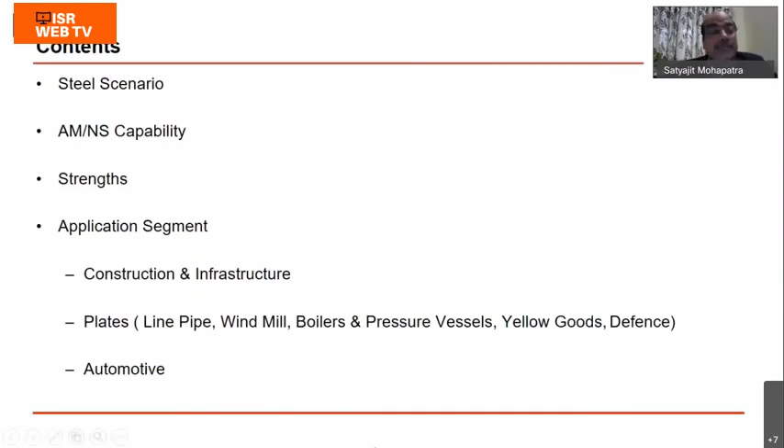So in my brief presentation, I'll be covering the steel scenario in the country today, what capability ArcelorMittal Nippon Steel has, what are the strengths, and what are the various application segments it covers, and how it has linkage to the entire technology. If you talk about the steel scenario, India is second in crude steel production.

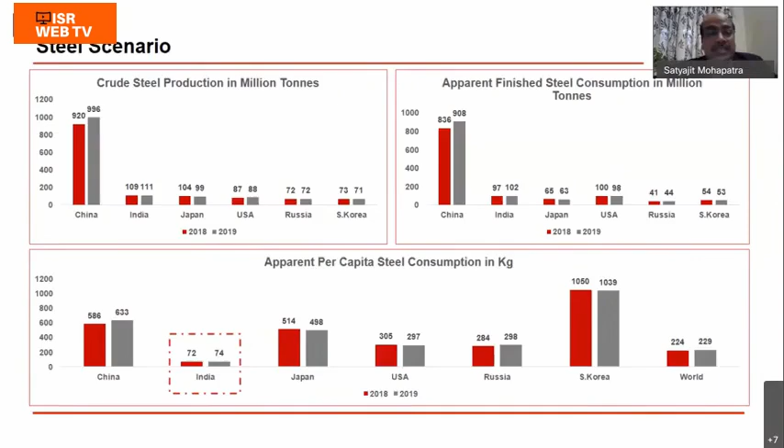As far as apparent finished steel consumption is concerned, India is also number 2. So definitely we have progressed a lot. But what has happened to the per capita steel consumption? We are at a very low level of 74, and compared to the industrial world standard of 229, we are at a very low level, which essentially means we have to go a long way in meeting the requirements.

If you analyze the entire steel consumption, 62% of total steel is used in the construction sector, around 10% in automotive, 3% in packaging, around 3% in railways, and the engineering industry consumes close to 22%.

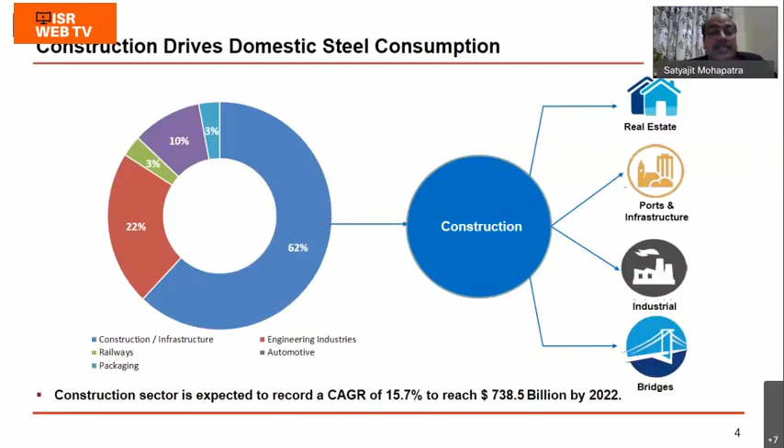As far as ArcelorMittal Nippon Steel is concerned, it is a joint venture where ArcelorMittal holds 60% and Nippon Steel holds 40%. And definitely there is India growth.

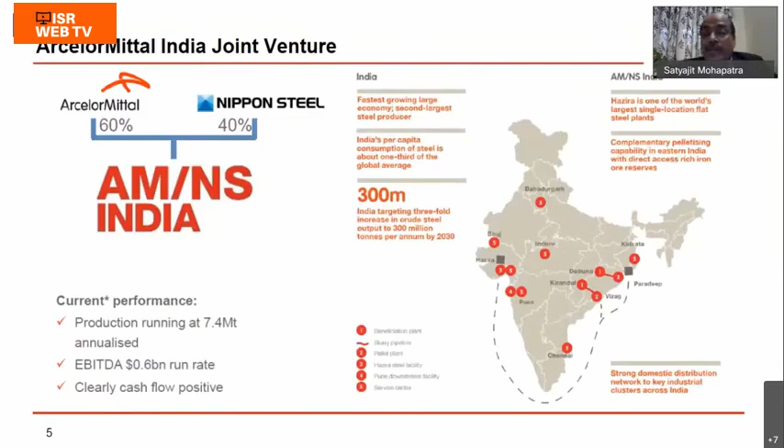India is the fastest growing large economy, second largest steel producer. India's per capita consumption of steel is about one-third of the global average, so there's definitely a long way to go. India's target, as per the national steel policy, is to achieve 300 million tons by 2030. This gives a very wide room for us to think how we can really achieve it, and this is where the technology of flat and long technology will definitely hold a key.

Coming to the entire process flow, when you talk about the technology, I'll give an example of the process we have in AMNS and how this is really helping. When you talk about the beneficiation of iron ore, we have our beneficiation plant in a place called Kirandul.

And we have a pelletization plant in Vizag. The distance from Kirandul to Vizag is almost 267 kilometers, connected through a slurry pipeline. This is nothing but technology. Can you ever imagine? This wasn't conceptualized today, it was conceptualized almost 20 years back. The slurry pipeline makes transportation very easy, and the raw material, iron ore fines in slurry form, is transported to the plant.

After pelletization, it comes to Hazira. From Vizag to Hazira, it comes by sea route. Today a lot of discussions are happening about transportation through sea route, but it was happening before, almost 15-20 years back. So this is how technology has advanced, not only in manufacturing but in logistics too.

As far as the Hazira facilities are concerned, we have a captive port adjacent to the plant which helps in logistics. Hazira is very unique in that it has 3 iron making routes: Midrex, blast furnace, and Corex. All three kinds of iron making routes are available in a single location, giving wide flexibility to use raw material to our advantage.

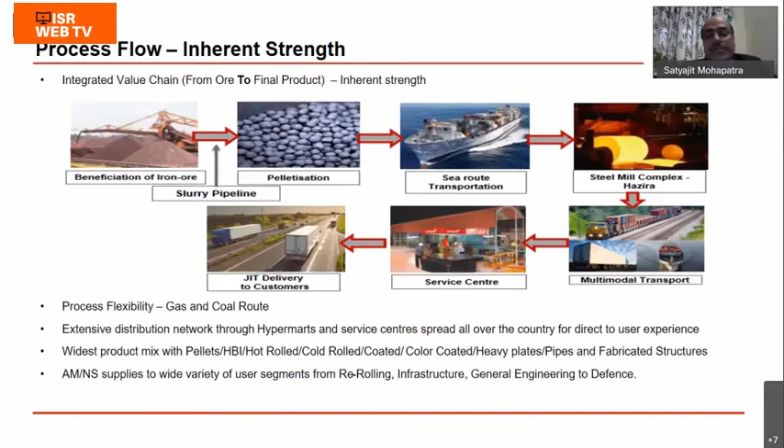Then, the widest product mix - pellets, HBI (hot briquetted iron), hot rolled, cold rolled, coated, color coated, heavy plates, pipes, fabricated structures - endless. So when you talk about flat products, you have the entire range of products currently available, which can meet the customer requirements.

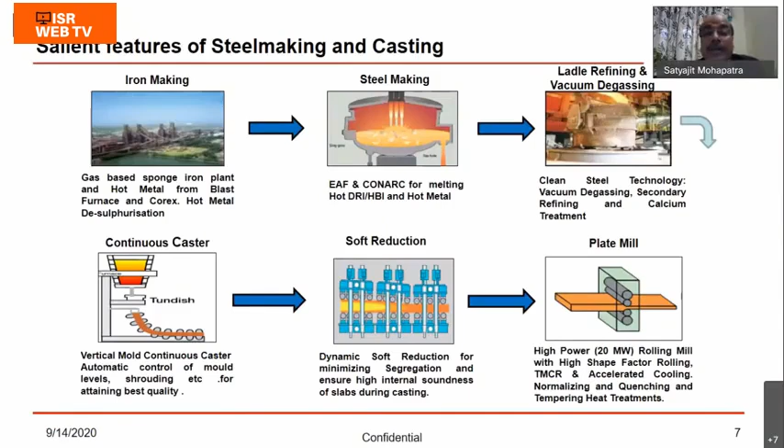Now, when we focus on technology, over a period of time the customer's taste and requirements have changed. Steel making and casting have really undergone a lot of changes with respect to the various processes, and today this is the result of what we are getting. This is just a basic, simple example of the steel making and casting process I've shown, because it talks about the various aspects - which stages are important and where we can get what kind of quality, how the quality is controlled at various stages.

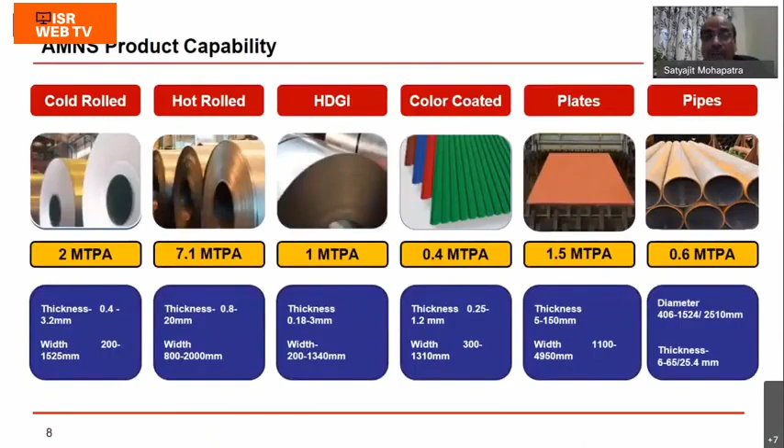As far as the entire flat product is concerned, we have cold roll, hot dip galvanized, color coated, plates and pipes. I'm not going to go into details of the entire product range.

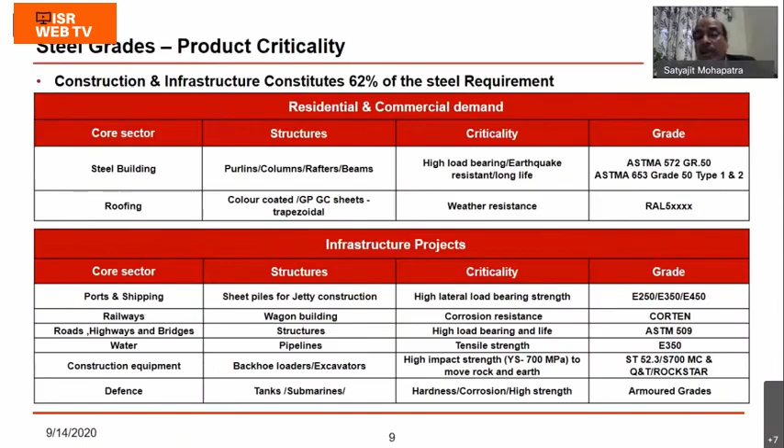Now I'll just try to focus on the application part - why do you produce different grades? When you talk about steel grades, as you know, construction and infrastructure constitute almost 62% of total requirements. Each product has specific requirements based on which the steel is designed, and accordingly you have the technology to produce steel to meet customer requirements.

Various grades of steel are used in various applications - crash barriers, steel and steel-concrete composite bridges. Mr. Susim Banerjee is here; INSDAG has done tremendous work on steel and steel-concrete composites, where, if you talk about the life cycle cost analysis, steel-concrete composites have a better chance and can be used. It is a very compact product, and at the same time it can really help in increasing steel usage in the country.

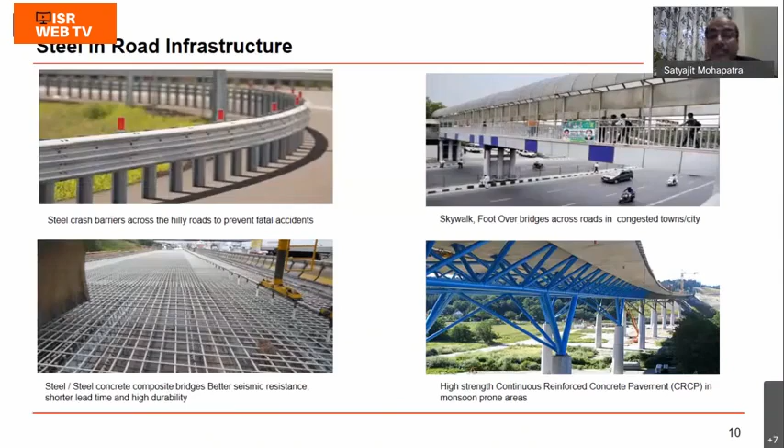Similar uses are there in various sectors - steel in rural infrastructure. In fact, the rural sector is growing at a very fast rate, with a lot of storage grain silos, farming equipment, and housing for all. So there are numerous requirements coming up where steel is used, with better quality.

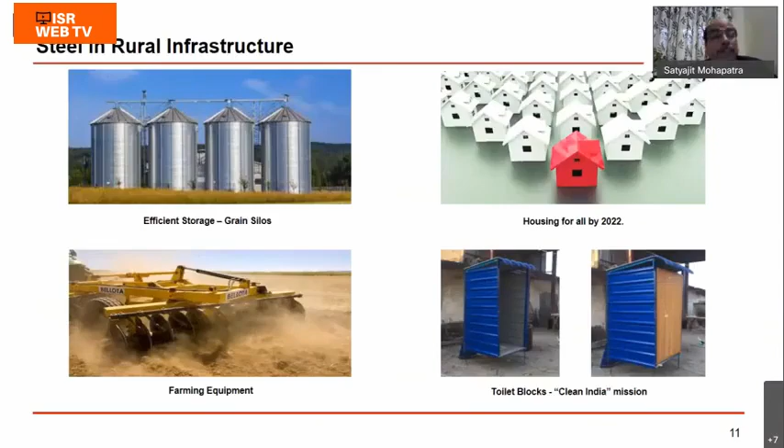Now I'll give a typical example of how steel is designed. Take the line pipe, used for both sour and non-sour applications - the basic important requirements are based on the application. If you talk about line pipes, it requires resistance to hydrogen-induced cracking, and soft reduction, that is metallurgical soundness, meaning it should be very good quality.

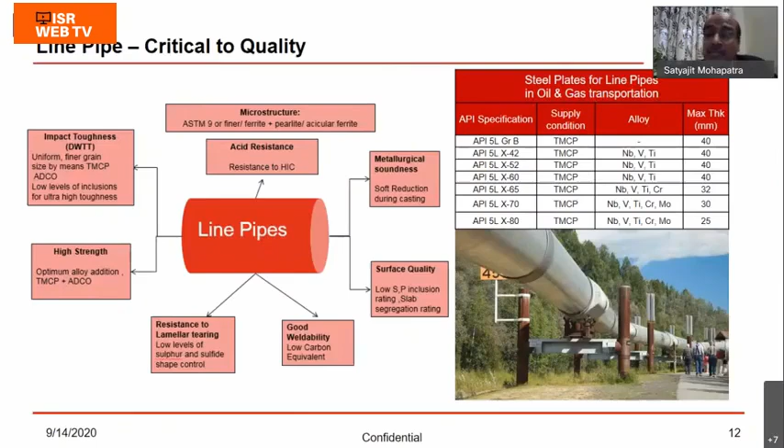The surface has to be excellent, it should have good weldability, and resistance to lamellar tearing. So when you want so many applications and requirements for a particular product, how do you design the steel? That steel has to be designed, meaning your technology has to support the requirements. Unless you have good technology, you will not be able to produce steel for the kind of applications I'm discussing today.

Same is the logic with wind tower segments - the steel used in wind towers. I'm not going into details, but also talking about boilers and pressure vessels.

Let's talk about the boilers and pressure vessels. The kind of steel being used today, and going forward, will have numerous applications. Today it requires a lot of effort in designing steels, and your technology has to support that. Almost all industries have the facilities now.

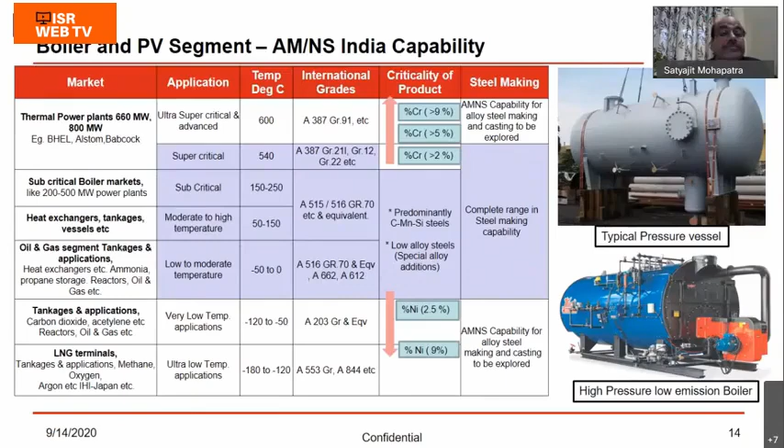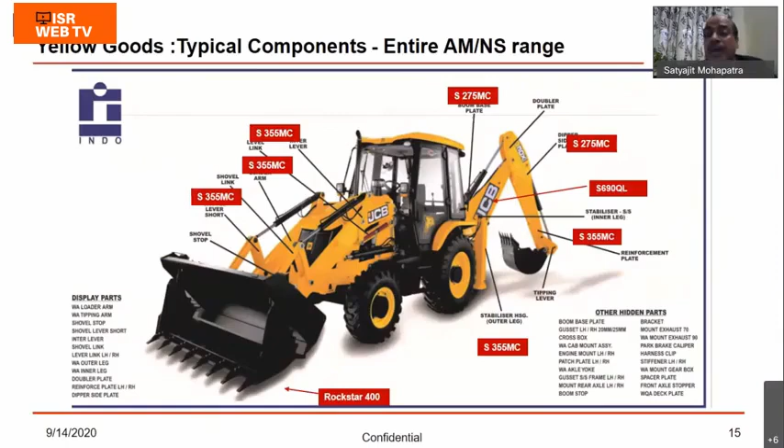Talk about the yellow goods sectors - today 100% of the steel is localized. There isn't a single steel type we cannot produce; we have the capability to produce all kinds of steel required for the entire segment.

Talk about automotive steels, your chassis - see how the strength level has gone up. Just as an example of chassis: a few years back, the yield strength of chassis frame steel was 460 megapascal. But today it has changed to almost 700 megapascal. When you change the strength level from 460 to 700, that definitely requires your technology, your mill has to be capable enough to roll high strength steels.

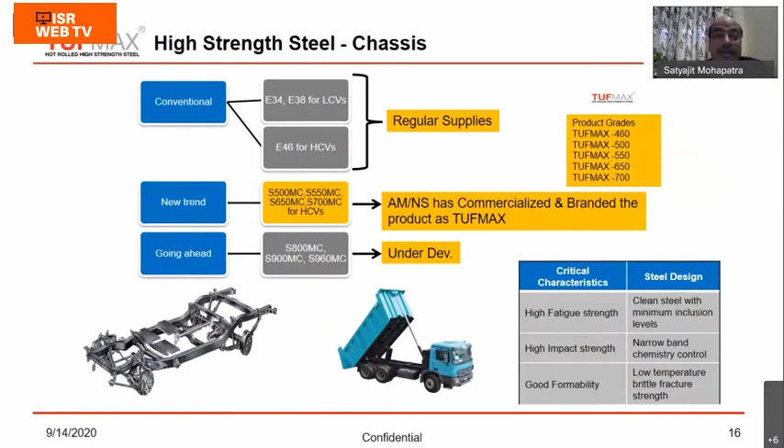Then you need the steel making facilities - not only upstream facilities but also downstream facilities, to process the high strength steels at our service centers. So these are the kinds of challenges that steel mills have faced over time, but today all of us are confident and can supply steel as per the requirements.

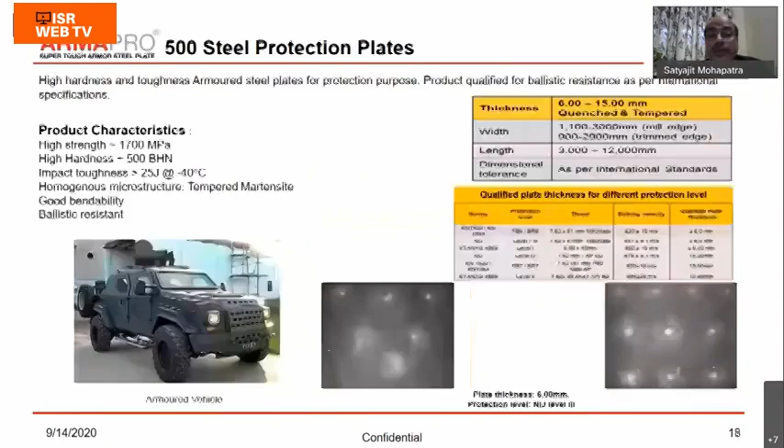Same is the case with wear resistant steels. These steels are used in various applications - that's what we have branded as Rockstar. Then there's ArmaPro, the armor grades of steel currently used for defense applications.

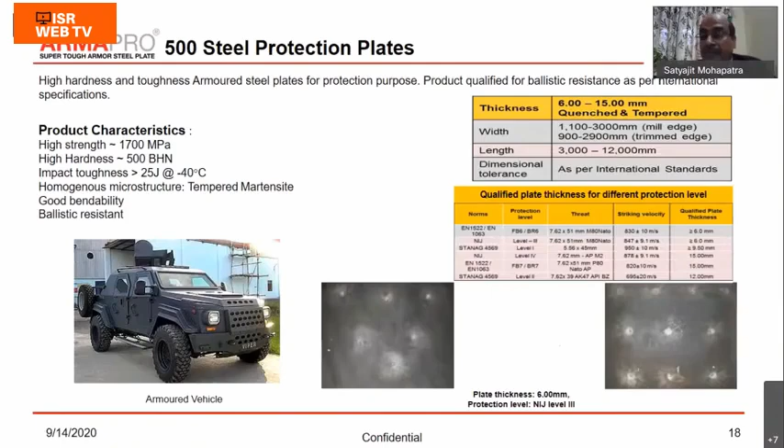As you all know, the government is giving a lot of importance and emphasis on defense. A lot of steel was being imported, but today it is being indigenized. In fact, yesterday's newspaper showed that MIDHANI has started producing bulletproof jackets, and we have the capability to produce that kind of steel. So this is the localization of all the steel required for the country.

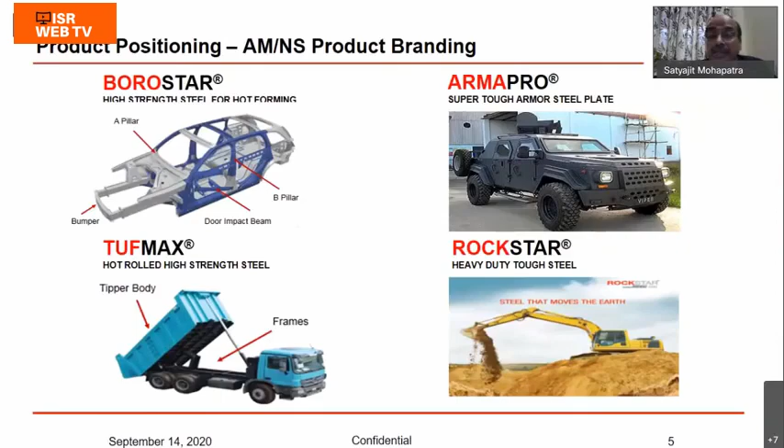As far as AM/NS is concerned, all the products we have branded - Borostar, used in passenger vehicle segments. TufMax, used in tipper bodies and chassis frames. ArmaPro, in the armor grades of steel. Rockstar, the wear and abrasion resistant steels used in the yellow goods segment. So these are the steels being used.

Now coming to the projects - we all know about Rohtang Tunnel, Dhola-Sadiya Bridge, Chenab Bridge, Bogibeel Bridge. We should understand that Rohtang Tunnel is the world's highest road tunnel, Dhola-Sadiya Bridge is India's longest bridge, Chenab Bridge is the world's highest rail bridge, and Bogibeel Bridge is India's longest rail-cum-road bridge.

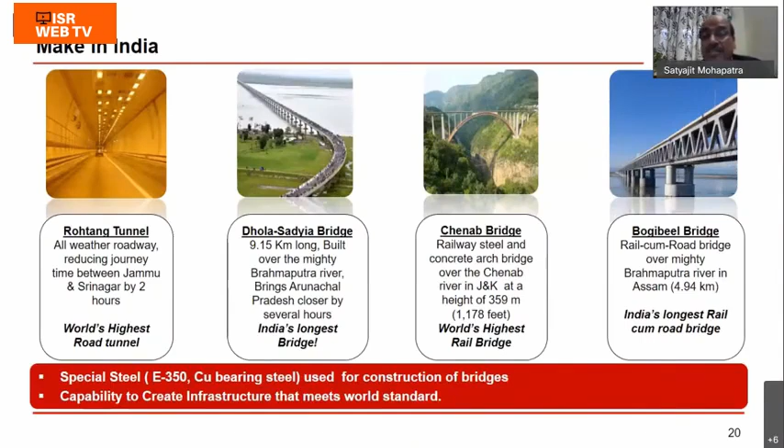This steel we have produced and supplied, so we should be proud of this. As Indian citizens, we should be proud that domestic steel has been used to make world-standard bridges. There are different prestigious projects already made where the steel has been used for metros.

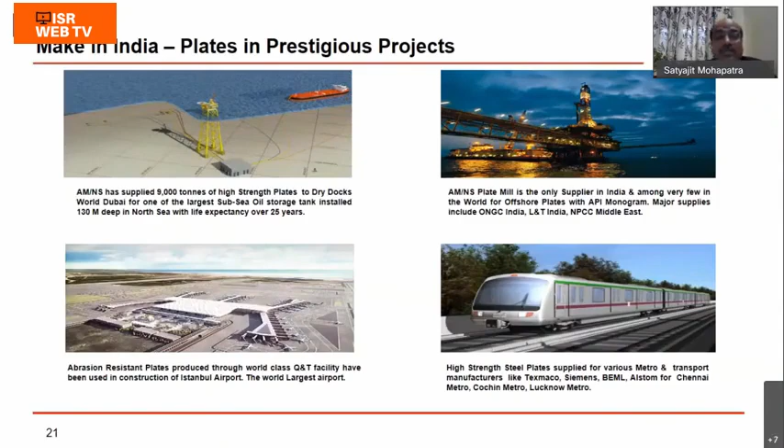Talk about offshore platforms, and the steel used in the quench tempered facilities for the Istanbul projects. So various applications where steel has been used.

Now, one more thing - for defense, this is the only domestic mill approved as a source for special steel for Indian defense. So today we are capable of supplying steel for battle tanks, armor vehicles, and naval ships. All these grades of steel that we produce and supply to customers have one objective: to meet the end product requirements, and to improve our technology to meet these kinds of requirements.

Just last Friday we had a meeting with the Ministry of Steel, where Additional Secretary Srimati Rasika Chaube was conducting. The main point emphasized was that today the steel being imported for automotive applications - how it can be localized, and what are the various ways by which we can localize all these steels.

Today, most automotive OEMs have achieved almost 98 to 99% steel localization, but to achieve 100%, there is still scope. So the objective is to have 100% localization, and with Atmanirbhar Bharat, we need to focus on the end product requirement, and accordingly the technology has to be in line with that requirement.

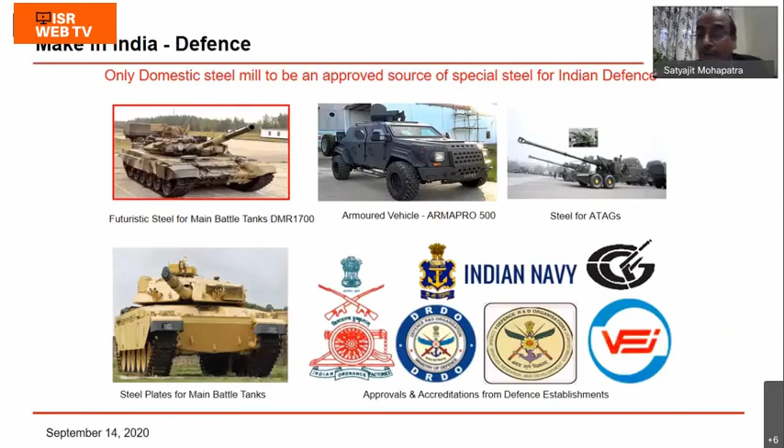This is definitely, it has to go hand in hand. Thank you.

Now our second panelist is Dr. Ramen Datta, another close friend of mine. We work together in SAIL.

Dr. Datta graduated from B.E. College Shibpur and obtained his PhD in Material Science from IIT Delhi. He joined RDCIS SAIL and served in various capacities as Head RDCIS Rourkela and Bokaro Center, and he superannuated as General Manager, Steel and Refractory. Presently, Dr. Datta is working as a consultant to Steel Research and Technology Mission of India, SRTMI.

Dr. Datta is a prolific writer, with publications in national and international journals, and 22 patents to his credit. He is the recipient of the Metallurgist of the Year Award from the Ministry of Steel, Government of India, the O.P. Jindal Award by the Institute of Metals, Metallurgy and Material Science Gold Medal, SAIL Gold Medal, and recognition from the Institute of Engineers. Dr. Datta is also a life member of the Indian Institute of Metals.

No, Mr. Patra is not here. Mr. Patel is here, Nagesh Patel. No, Mr. Arijit Biswas is here instead of Mr. Patel. Biswas, okay. So, Arijit Biswas, should I call him now? Yes.

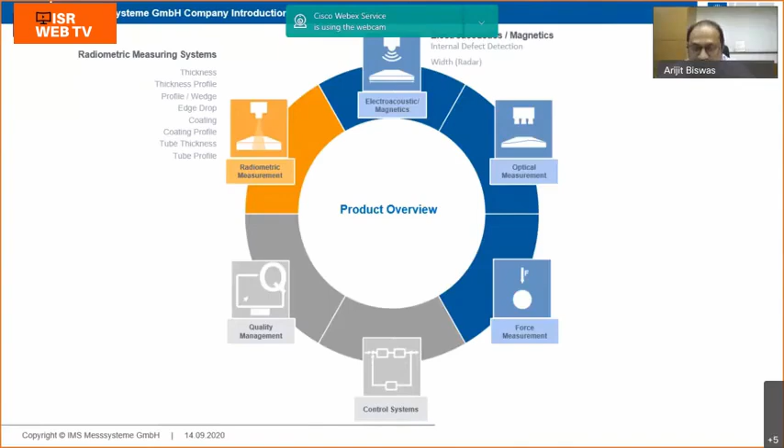The next category of product is electroacoustic and magnetics. One product I will show today is internal defect detection, recently developed by IMS, and width measurement with the help of radar. This application is mostly suitable for the roughing mill in a hot strip mill, where there is a lot of steam and water, due to which a normal stereoscopic width gauge sometimes has problems in measurement. So here we can use radar measurement for width.

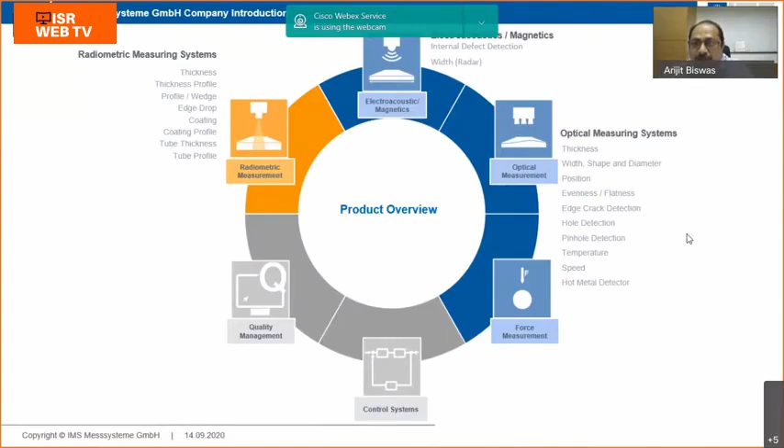Then we have optical measurement, where we are going with thickness, width, shape, and diameter, then position, flatness, and hole detection—pinhole detection and hot metal detector.

Recently, IMS has also come up with force measurement, that is the strip tensiometer, based on the principle of load cells being used.

For the control system, we are not that much into control systems, but for some small mills or small applications, we are able to do strip thickness AGC, flatness AGC, and also coating control.

Then we have our quality management system, where we can archive all the data—we can connect all our systems into this data management, which we call Mavinet Q, where we can store all data related to each and every aspect of the coil for long-term evaluation or quality evaluation.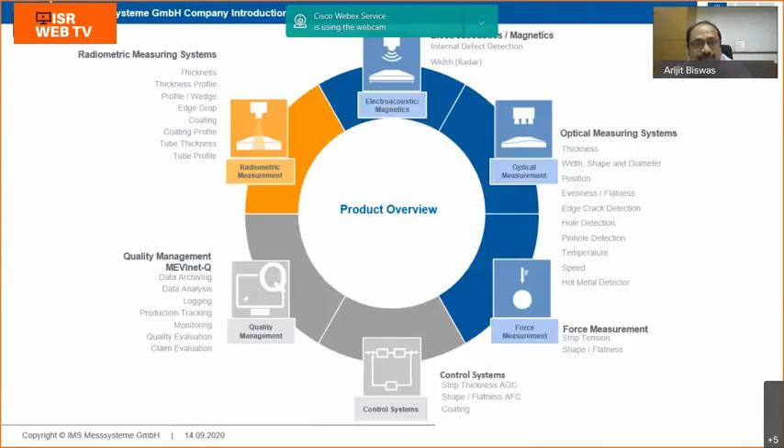The first product I will show you—all these are new products—is the multi-channel profile gauge system for cold strip. Normally, we have seen that at the exit of the hot strip mill, gauges are installed for multi-channel profile gauging, which is used in almost all hot strip mills in India today. But as of now, we don't see much profile measurement for cold strip mills. So IMS has also come up with this product of multi-channel profile measurement for cold strip mill.

With this system, we can measure the strip thickness at the center line, and simultaneously measure the thickness cross profile across the width of the strip. With the help of that, we are able to give you the wedge, crown, and strip width, and with the help of a laser speed velocity meter, we are also able to get strip speed. Here we use two X-ray tubes and an array of detectors at the bottom, and we also use two laser lines and a camera to detect the width of the strip.

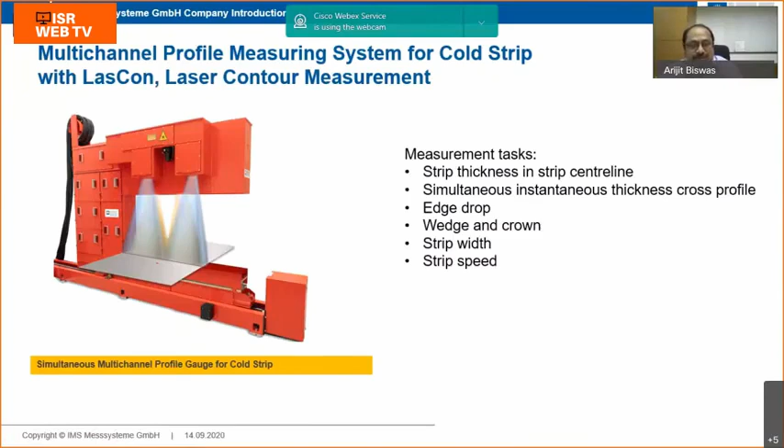The other development from IMS is the surface inspection system for cold rolled strip. Here also we are using camera and LED light illumination to find out the defects in the cold strip. And on the screen you can see the achievable resolution that we are able to get.

The advantage of this surface inspection system by IMS is that we have developed it in a C-frame. Most surface inspection systems are fixed in nature in the line, but here it's installed in a C-frame. So in case of maintenance or any strip breakage, it's much easier to get the whole system out and do the maintenance and cleaning for any problems we are facing. So it's much easier to diagnose.

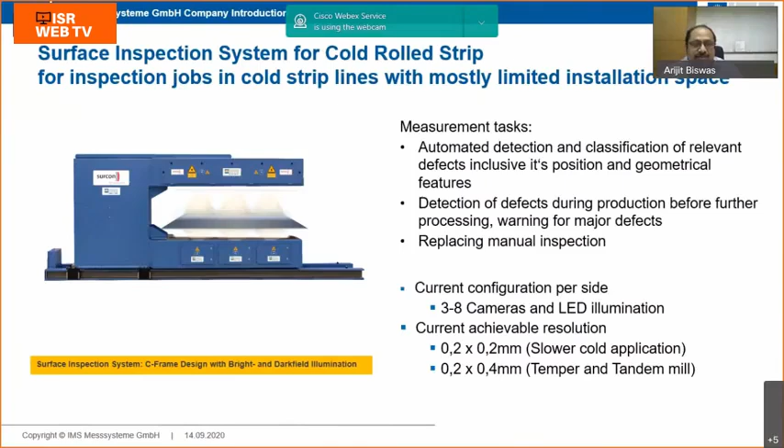The measurement tasks being done are automated detection and classification of defects, including position and geometrical features, detection of defects during production, and warning for major defects. This helps in replacing the manual inspection that has been done by many plants.

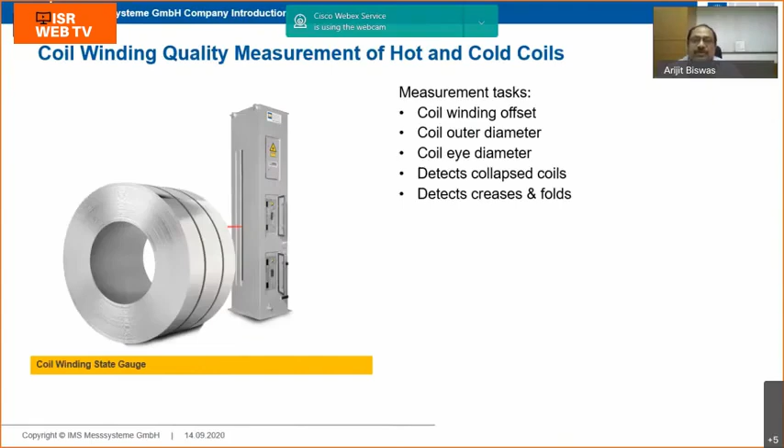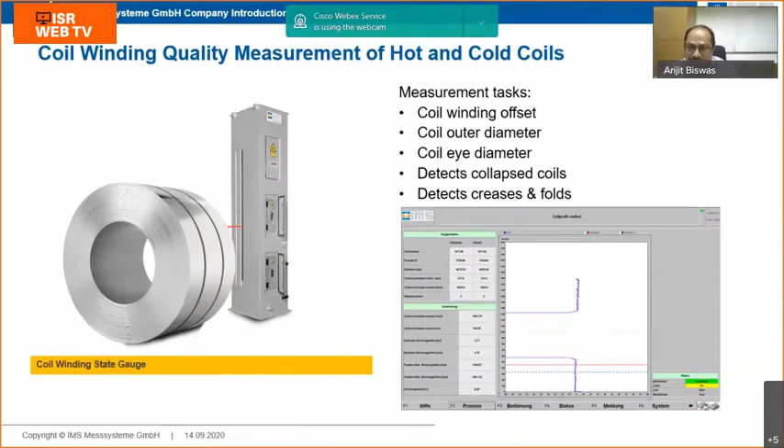The next product is the coil winding quality measurement. This is also a laser-based system using the laser triangulation method to find out the coil winding offset in hot strip mill or cold mill. We are also able to measure the coil outer diameter, the coil eye diameter, and it detects if the coil has collapsed or has been wound properly or not. Here you can see one screen which shows the profile of how the coil has been rolled, and whether it's in synchronization or not.

So as I told, this also comes with the gauge using laser, and we also have a cooling water unit to keep things cool for the hot strip mill. We also certified some calibration standard to check if the system is working properly or not.

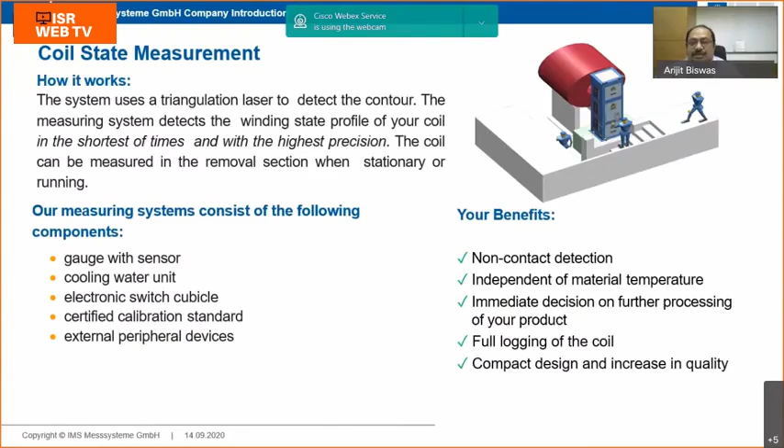The benefits we are getting are that we are able to detect the coil's winding quality without any contact. It is independent of material temperature, so we can use it in hot as well as cold coil, and we can have full details and logging of the coil in our system, and the customer can decide whether to process this further or not.

The next recently developed system is internal defect detection for cold rolled strip. At present, one prototype is being installed in one plant in Germany, which is still under observation, but the results are coming very good.

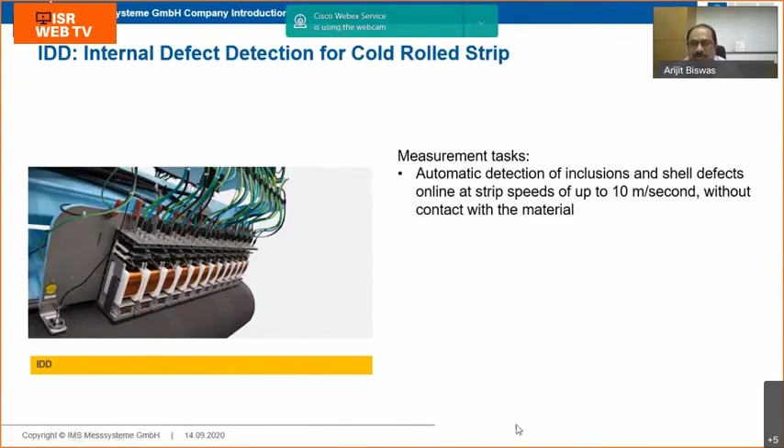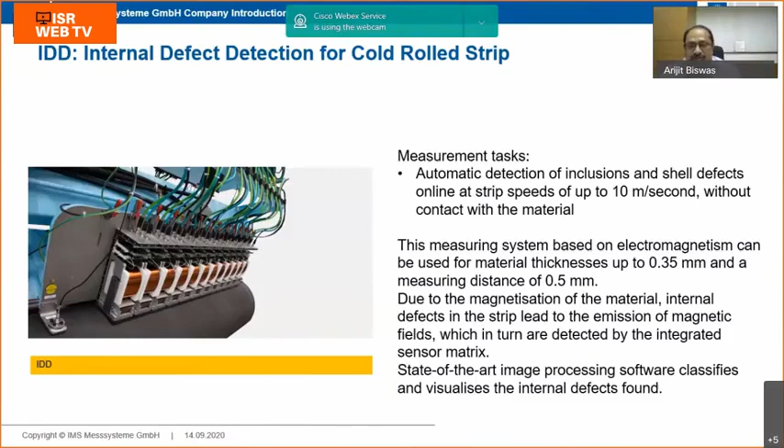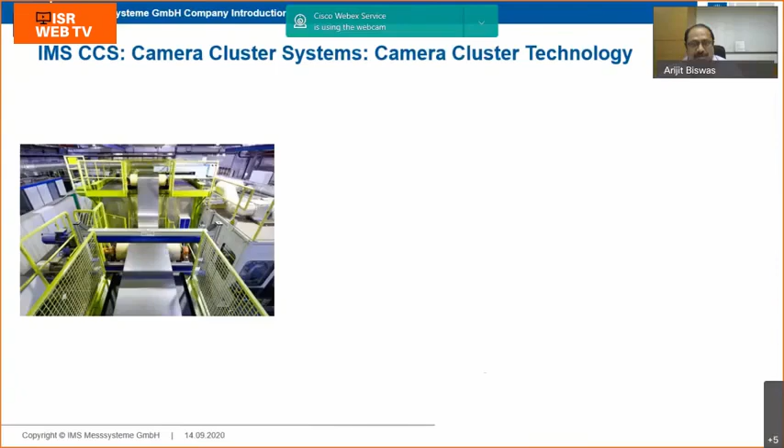The next important and patented technology is the camera cluster system. For width measurement in the past or even now, we have been using two cameras to measure the width of the strip, but in this camera cluster technology, we are using a cluster of cameras.

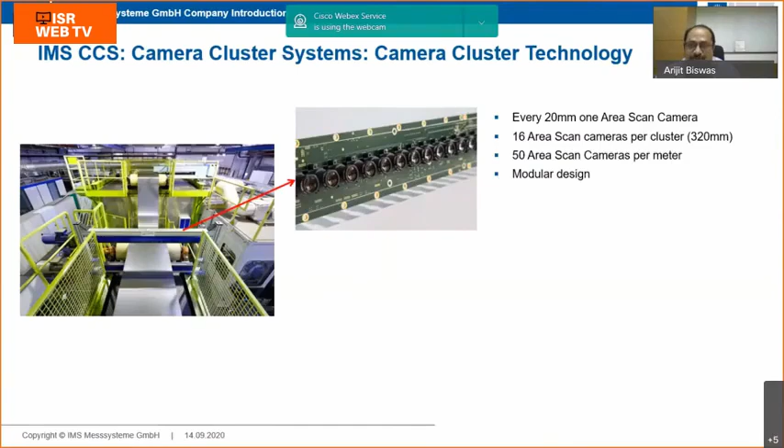Each camera, from diameter to diameter, is situated at 20 mm distance, so one camera to the next is just 20 mm. These cameras are put in a cluster where we are putting 16 cameras together, covering around 320 mm. Depending upon the width of the material, we decide the number of camera clusters needed.

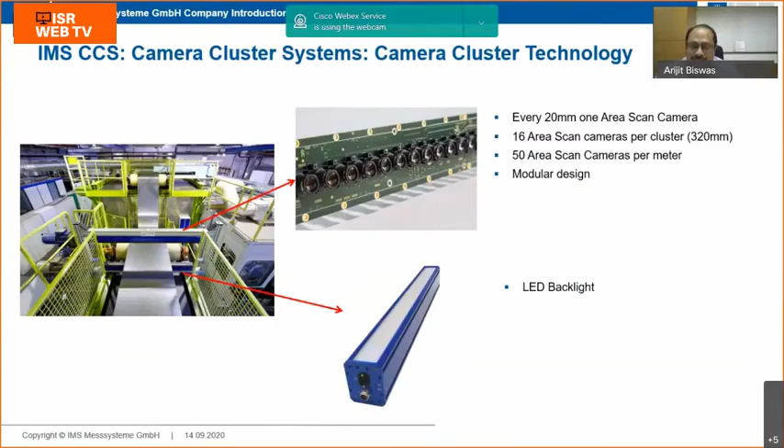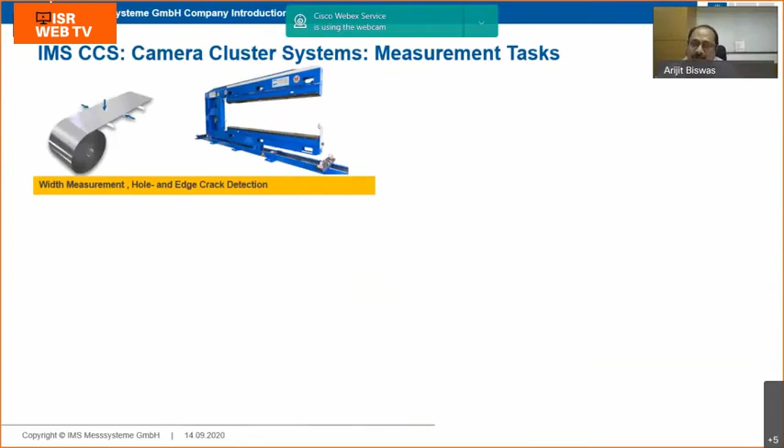We are also using LED backlight, because for the cold mill we need light to illuminate the strip. This camera cluster technology system is, as on date, only applicable for cold mill applications. These are the measuring tasks which can be done with one system. This same camera cluster system can also be put into the C-frame, and we are able to measure width, hole, and edge crack with one single system.

By using a different, more powerful backlight and decreasing the pass line, this technology is also used to determine the pinhole.

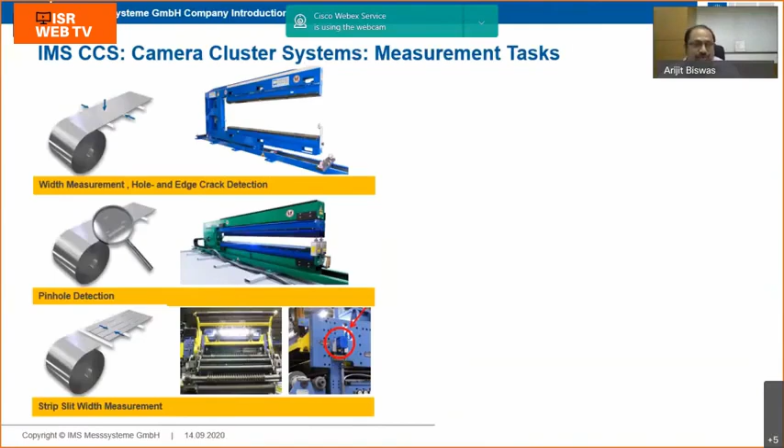The other important application is the strip slit width. Since we are using a camera for each 20 mm, we are measuring each portion of the strip, so we are able to give you the online strip slit width. Each slit width we are able to measure online, and we can give you the results.

The same system is also used for camber measurement, and the same system is also used for flatness measurement in CGL lines where the tension is less.

This CCS system is also used to measure the sheet geometry. So for each sheet in the slitting line, we are able to measure the strip geometry by providing the shape of the strip and also the diagonal measurement of the strip.

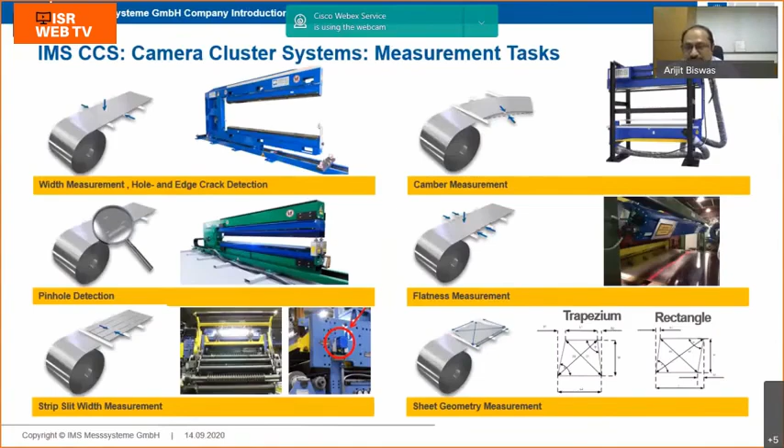And for long products, IMS has also come up in the last 3-4 years to measure the billet contour, which is normally installed at the caster exit, where we are able to measure the contour of the billet.

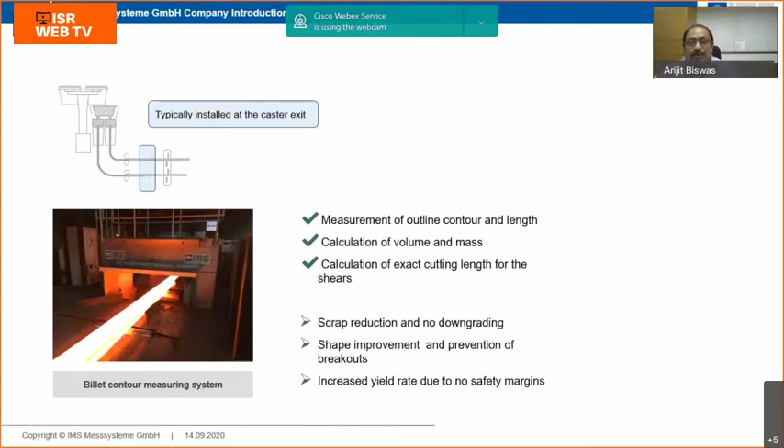So here we are able to measure the outline contour and length, and optionally we can measure the volume and mass. With the help of our measurements, we are able to give you the exact cutting length for the shears.

The principle of measurement remains the same, that is laser triangulation, but we are using line lasers and area cameras to find out the contour of these billets.

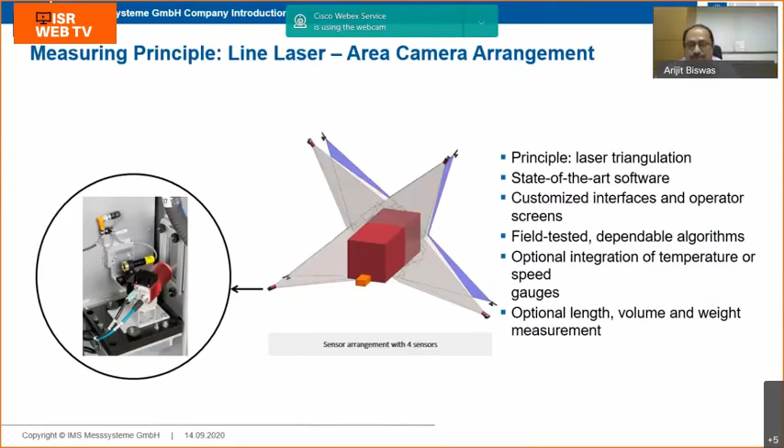All the systems are customized, so we are able to customize the system depending upon the application. In this system, we are also able to integrate temperature and speed gauges to measure the temperature as well as the length of the billet, and optionally we are also able to measure volume and weight.

So this is a typical system. We are able to do it as a single strand as well as double strand system. The whole O-frame is water cooled and air cooled, so temperature is not at all a problem.

And the major advantage is that the key components, that is the camera or the lasers, are not rotating, which means less maintenance and more life and reliability.

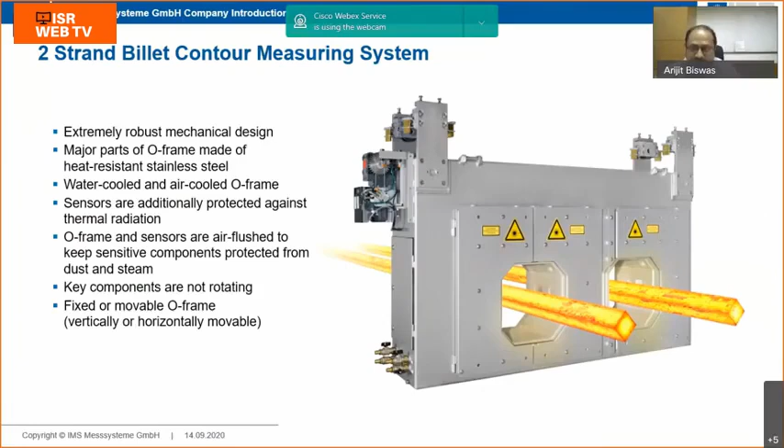This whole frame can also be moved vertically, up and down, to adjust the billet position or adjust for the billet diameter, so that the billet passes through the center of this system.

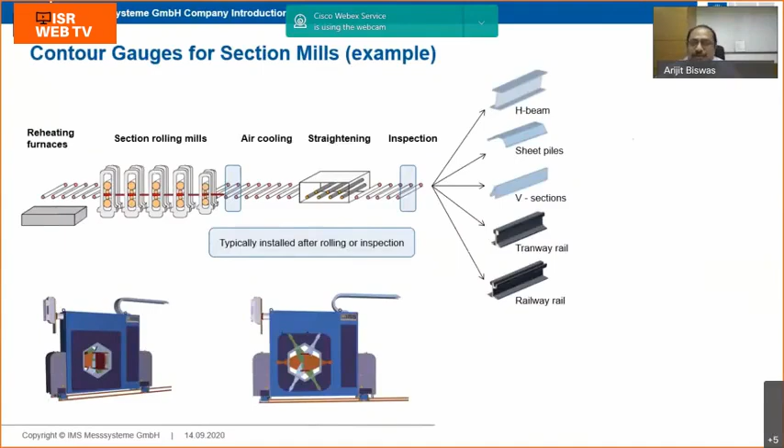So these are some of the examples where we can measure the profile of these long products.

And that's it from me. Thank you.

I think this is a very good presentation, and it will improve customer service by indigenous steel producers, because earlier, about 10 years back, there were frequent complaints from customers about width variation, size variation, and many other issues, even if the test certificate issued by the plant had confirmed all the variations had been taken care of.